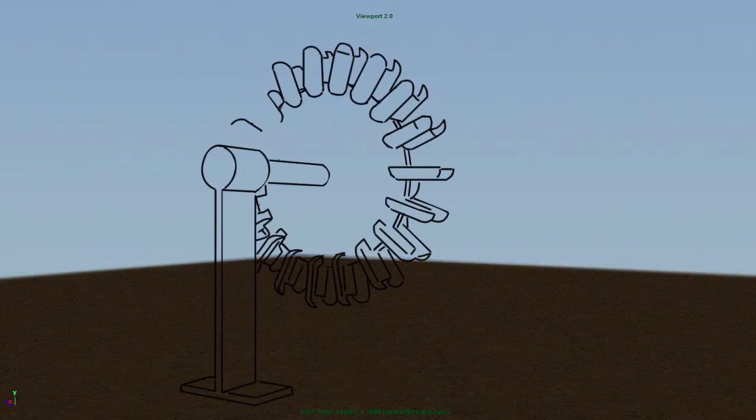Pelton wheel turbine. The Pelton wheel is an impulse-type water turbine. Named after its inventor, Lester Allen Pelton, this turbine converts the energy from the impulse of moving water. In these turbines, the wheel is moved with the help of high-speed jets. Movement of the wheel, in turn, helps to convert the kinetic energy into rotational energy.

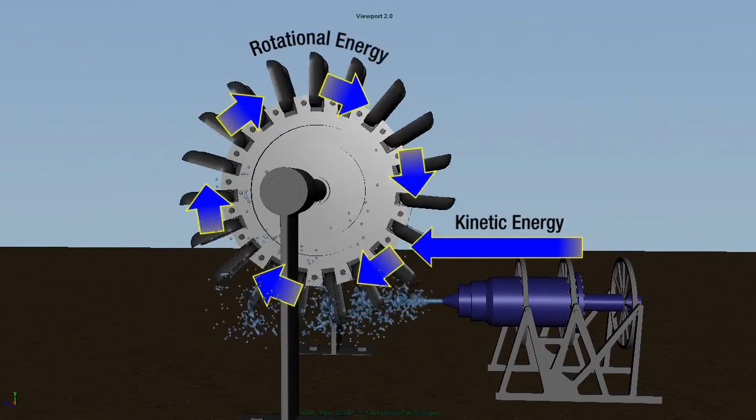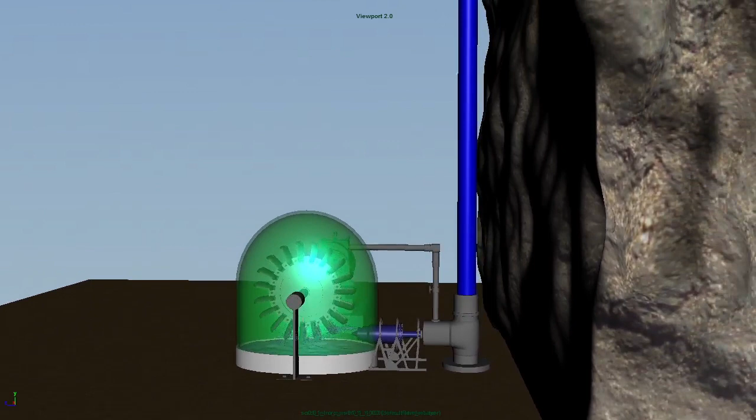It is one of the most popular turbines in the category of impulse turbines. Let us understand the design and working of Pelton wheel or turbine. This turbine works efficiently for power extraction when the water energy is available at high head and the flow rate is low. Pelton wheel turbine components.

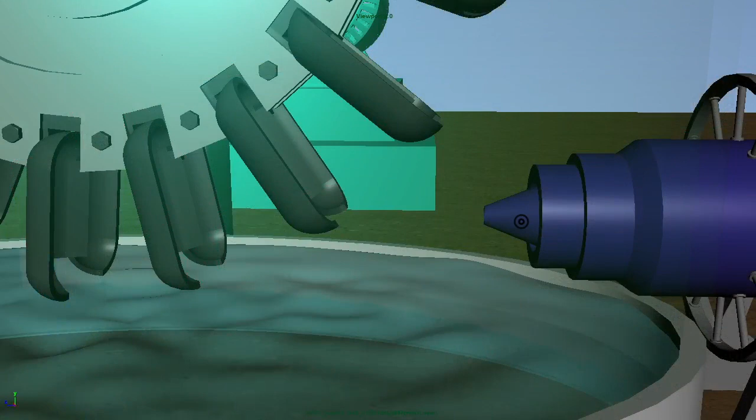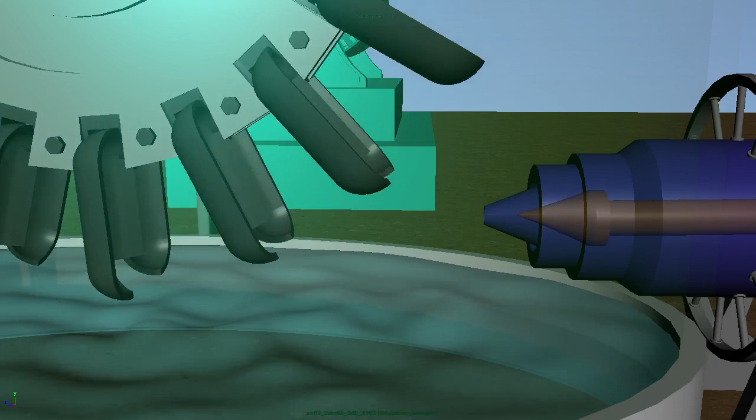Circular transparent window is available for visual inspection of the impact of jet on buckets. Penstock. This is a pipe-shaped tunnel that carries the water from dam to turbine at very high speed. Spear. It is a spear provided within the nozzle attached to the tip of the penstock to increase and decrease the flow of water. The water flow is controlled by moving the spear forward and backward.

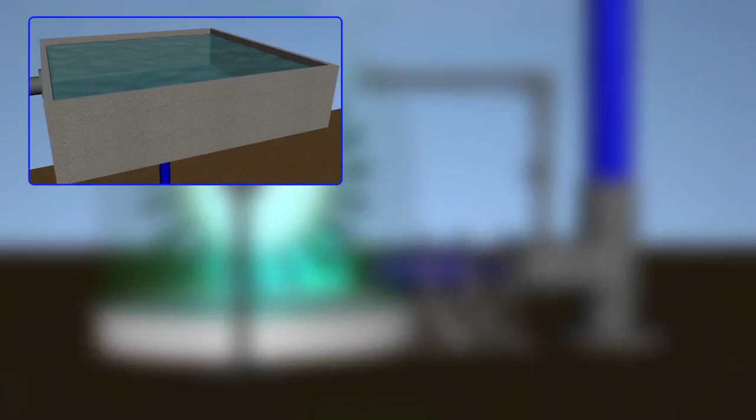Nozzle. It is attached on the tip of penstock having taper shape. Main purpose of the nozzle is to increase the velocity of the water. Number of nozzles depends upon the available water head and the operating requirement of the shaft. Hence, the nozzles placed around the wheel vary.

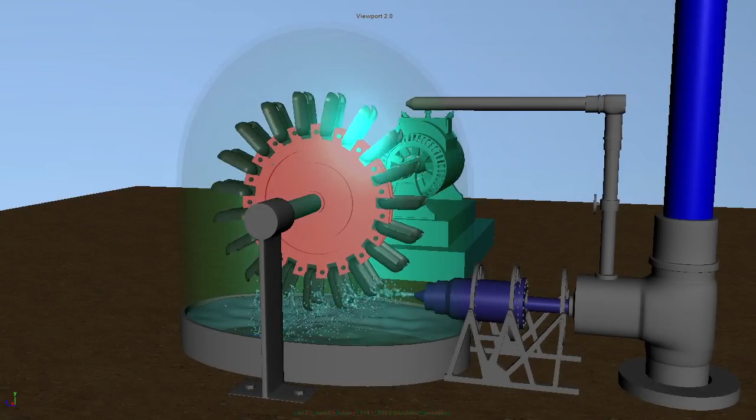Buckets. To the wheel runner, a specified number of buckets are attached. The buckets are spoon-shaped in the form of a double hemispherical cup or bowl. Runner. Runner is a large circular disc attached to the shaft. Buckets are arranged on it.

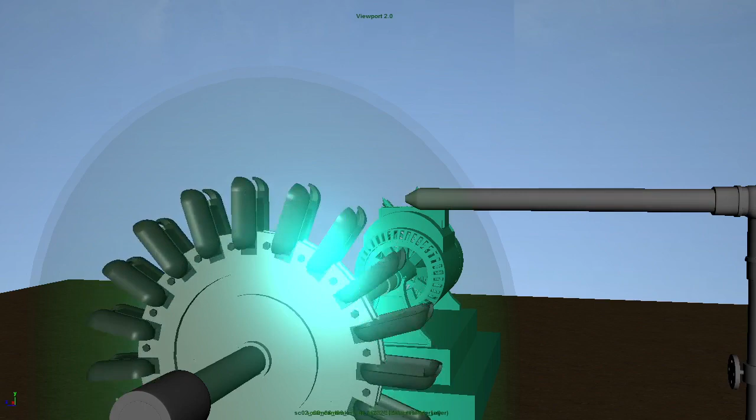Brake nozzle. Stops the turbine by sending the water flow to the back of the buckets. Braking jet. The runner does not stop immediately as soon as the water nozzle is blocked. At this time, the braking jet directs the water back on the buckets. Belt. Provided to load the turbine. Outlet. To return the water to the water source.

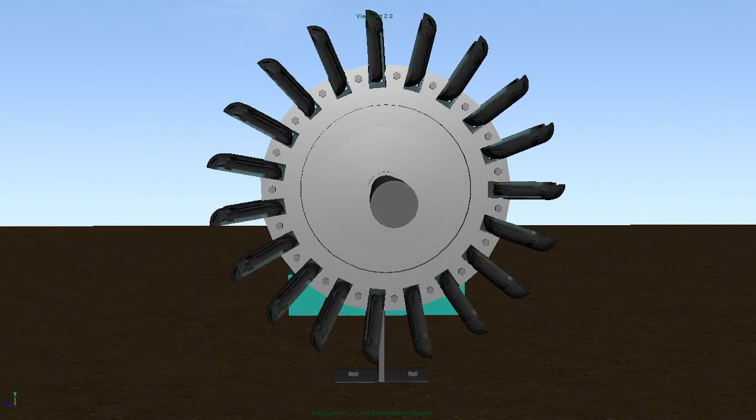Pelton wheel turbine construction. Pelton wheel has a rotor with circular disc. These discs have cup-shaped blades or buckets. These buckets are fitted on the circumference and are at equidistance from each other. The nozzles are attached to the penstock, arranged so the water jet is tangential to the wheel circumference.

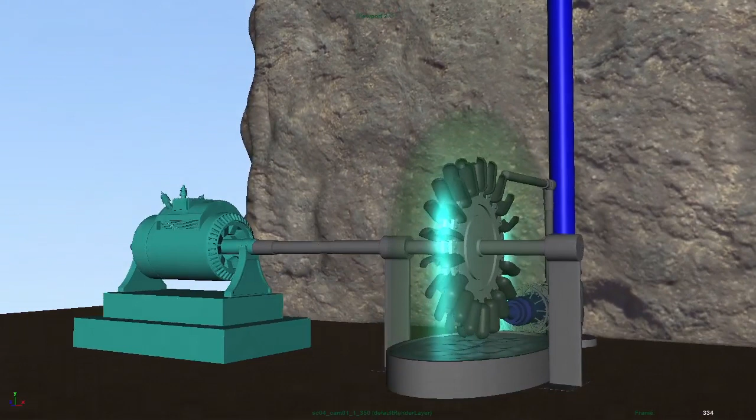Pelton wheel turbine working. The Pelton wheel turbines are usually implemented at the dams. At dams, the water of the flowing river is restricted and hence the water gains potential energy. Also, the water is at some height to that of Pelton wheel. Nozzles direct forceful, high-speed streams of water against the spoon-shaped buckets or the impulse blades fixed on the circumference.

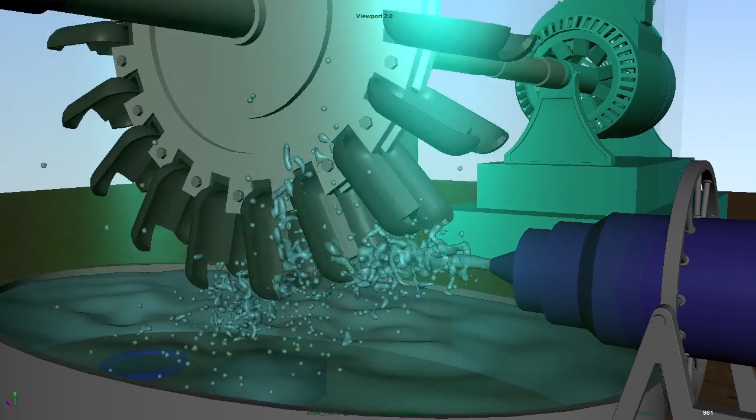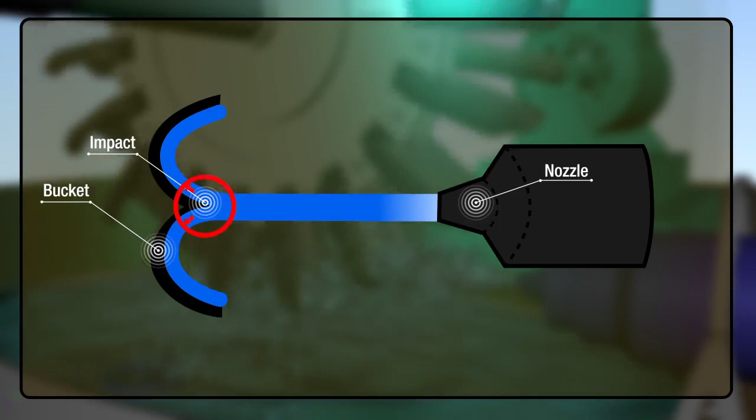Each bucket is divided into two symmetrical parts by a dividing wall known as splitter. It divides the jet into two equal parts. As the water jet hits the contoured bucket blades, the direction of water velocity is changed to follow the contours of the bucket. Due to this change in the momentum, the water stream produces impact on the blade edges of the Pelton wheel turbine. Water impulse energy exerts torque on the buckets and wheel system and helps the wheel to spin.

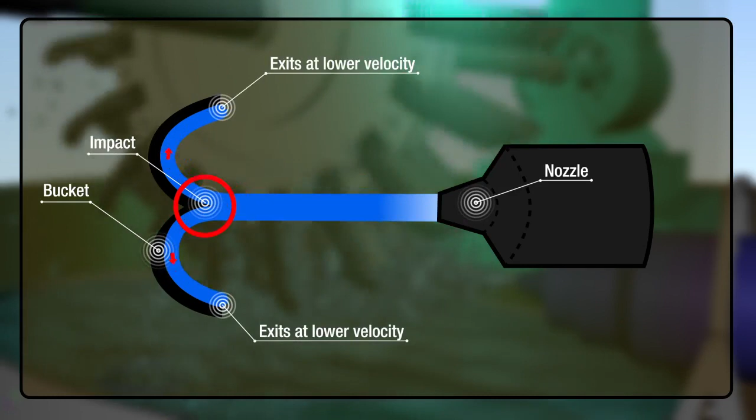The water stream itself does a U-turn and exits at the outer sides of the bucket, decelerated to a low velocity. In the process, momentum of the water jet is transferred to the wheel and hence to the turbine. This force makes the turbine rotate. The turbine is attached to a shaft. The rotating shaft runs a generator and produces electricity.

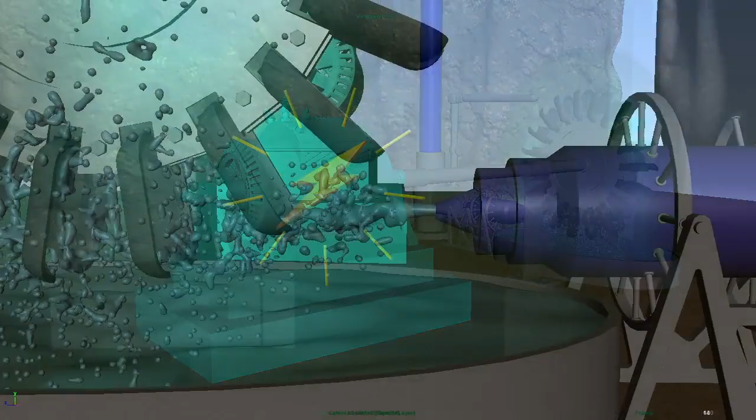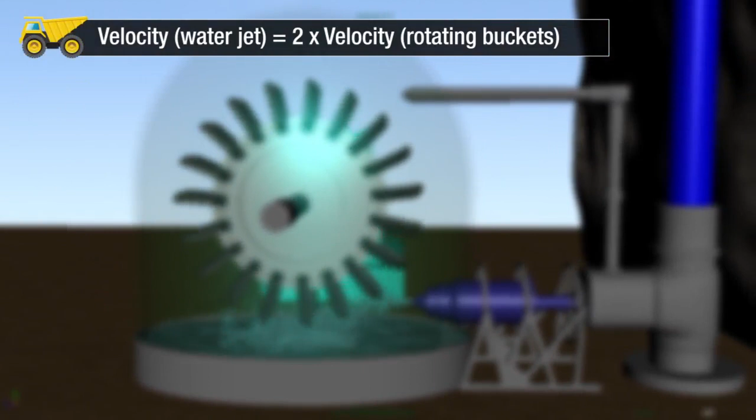For maximum power and efficiency, the wheel and turbine system is designed such that the velocity of the water jet is twice the velocity of the rotating buckets. Side-by-side placement of buckets balances the side load forces on the wheel and helps to ensure smooth, efficient transfer of momentum of the water jet to the turbine wheel.

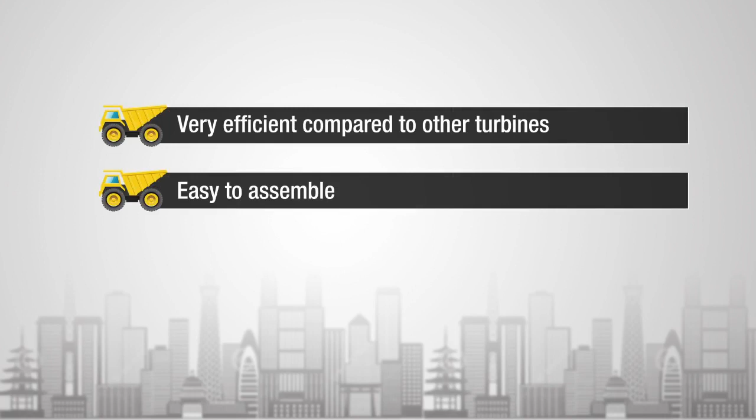Advantages of Pelton wheel turbine. Pelton wheel turbine is very efficient as compared to other turbines. Its construction is very easy. Even in silted water, it operates efficiently. Disadvantages of Pelton wheel turbine. Efficiency decreases with time as the components are very large. Its installation and maintenance costs are very high.

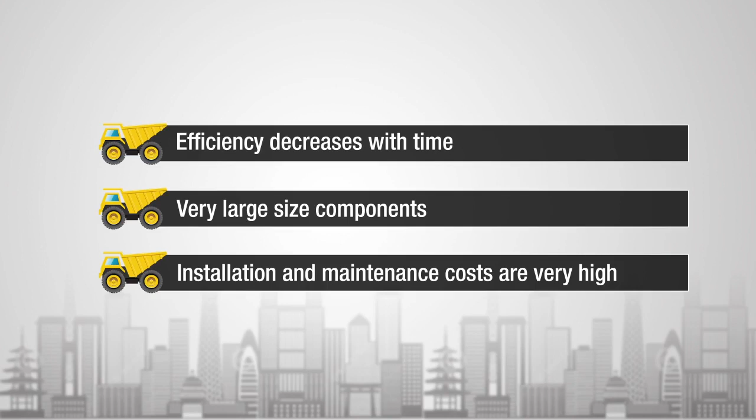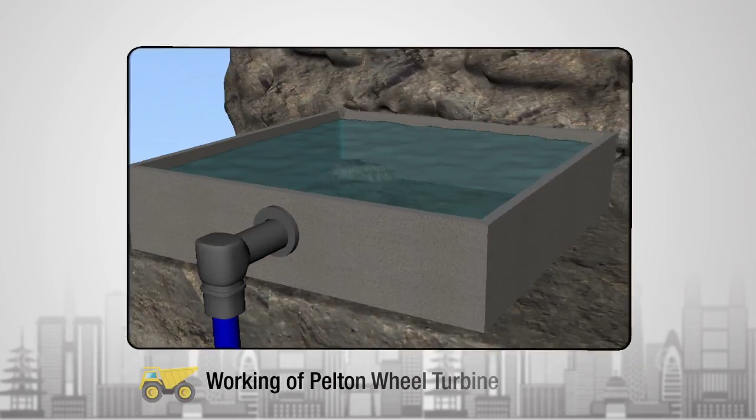Recap. In this lesson, you learnt about the components of a Pelton wheel turbine, its construction, working, advantages and disadvantages.